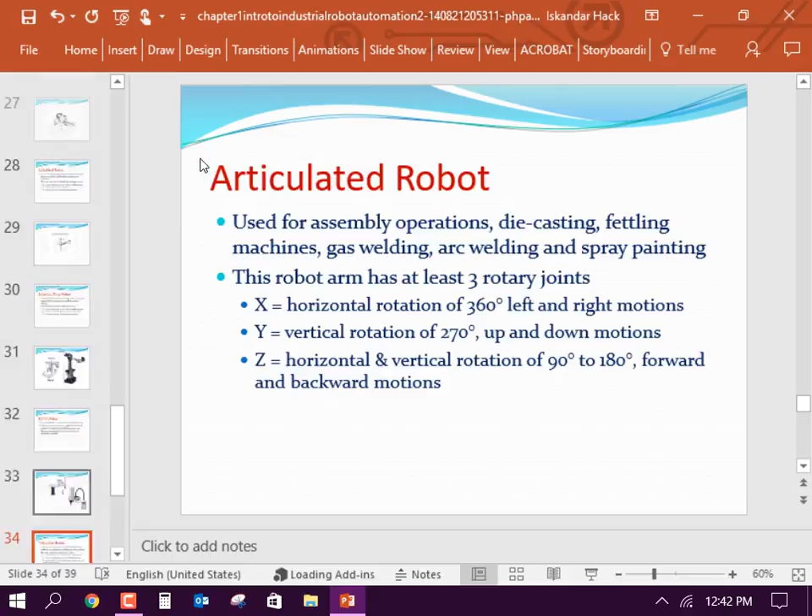All right, as a general rule, I hope that I don't have many canceled classes this semester. As some of you probably well know, last semester I had my stroke in April, which meant that I wasn't at work for about a month, and I'm still technically on MC. My MC runs through the end of October, and actually the doctor wanted to put me on MC till the end of the year.

And the reason I'm on quote MC, and I don't turn it in to UniKL also, I have the letter with me from the doctor saying that I'm not supposed to be at work because I have very low energy. I drive to work. I just started driving last week, by the way. My stroke was in April, and I was not able to drive till about a week ago. I had to force myself to drive because of my wife's surgery coming up. One of us has to drive, otherwise we don't eat, because neither of us have a lot of energy to cook.

So I come to class like an hour or two before class, get ready for class, and then I leave shortly thereafter. I'm not here a lot between classes. And Dr. Tyrell is very generous. He only gave me one class this semester, although it looks like I'll get a second class coming up, so I don't have it very tough. And the reason is also so that I can concentrate on my occupational and physical therapy.

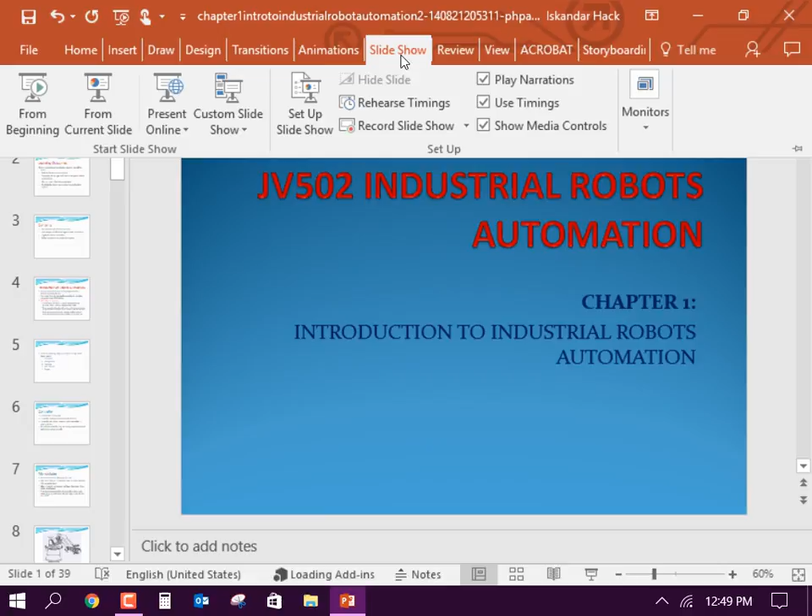So, okay, let me go through the slideshow from the beginning and talk about this. This is from a book that we're not using, and this is for a course that we're not teaching, JV502, Industrial Robotics and Automation. It happens to have the same title as this course, so the slides are good to steal, right? As I mentioned before, I used to worry about stealing people's slides, then I found all my slides have been stolen.

Okay, the learning outcomes for this chapter. I will try to find the book, but I will put up some links to some books that are available, or at least some good references. We're going to define what robotic automation is, the advantages and disadvantages, the 6 types, and explain robots automation in production. These are 4 things that cover the first few weeks of this course.

And I will tell you right off the bat that last semester and the semester before, one of the questions on the final exam is: state the advantages of using robotics in industrial applications. So right off the bat, this first set of slides has one of the answers to one of the final exam questions.

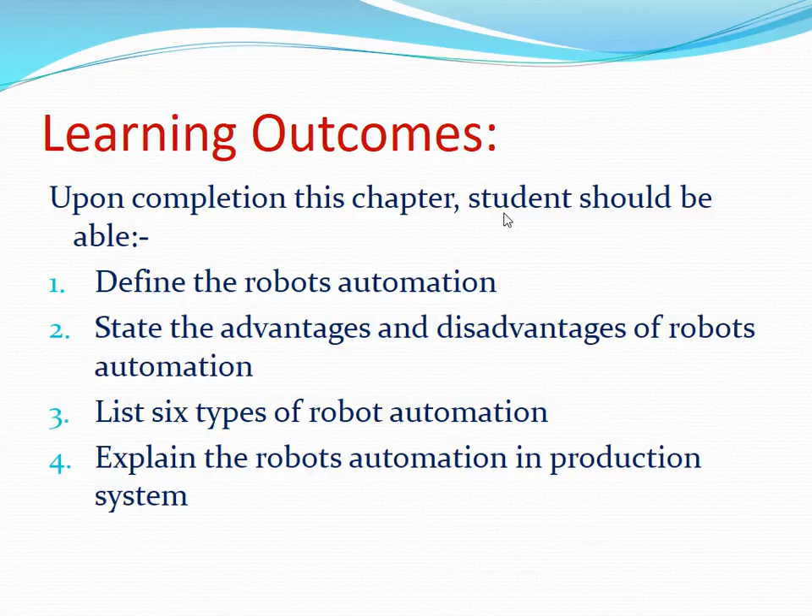Now, I'll review all these comments just before the final exam, but I'm saying that at least 1 out of the 5 final exam questions comes a lot from this first set of slides. So, okay, contents, this just repeats the same thing. Okay, what is a robot? I'm not going to read these to you, but I'm going to explain them.

It's a machine that can be programmed to perform a variety of tasks. In other words, it's a mechanical machine that's normally computer controlled, not necessarily, but normally computer controlled, that performs a task or a variety of tasks. Normally for something to be called a robot, it can't perform just one task, but multiple tasks. It can be reprogrammed to do different things. Now, the robots that were talked about last week in that video, some of those were learning robots that are being taught how to teach themselves.

As a general rule, 99% of the robots today that are outside the research circle are robots that are programmed to perform a task or multiple tasks by a programmer. Now, robots are designed and built by companies that build and design robots.

I suspect that none of you will probably work for companies that design and build robots, but I could be wrong. I used to say that back in the U.S., and lo and behold, General Motors, a company that some of you have heard of, and I'll talk about them in more detail, opened a factory in Fort Wayne, Indiana, the city that I was living in, and they actually had some engineers that graduated from our program design robots there.

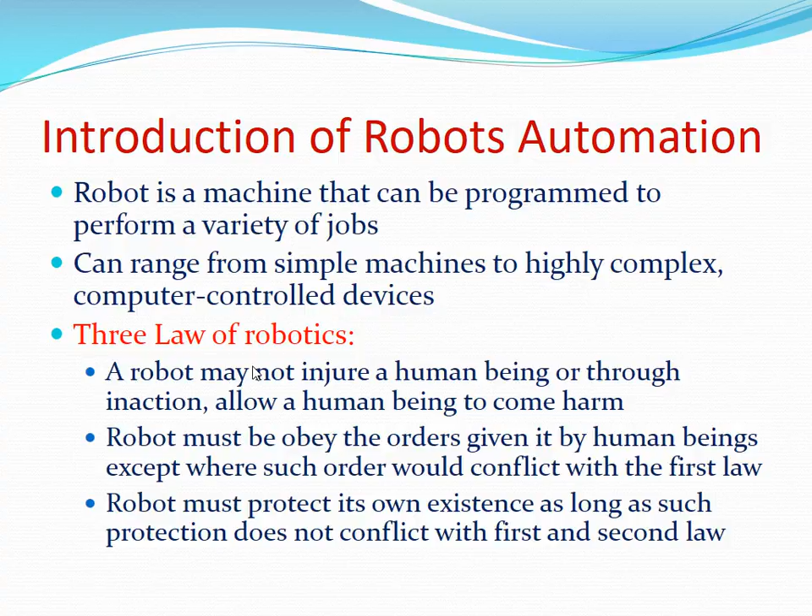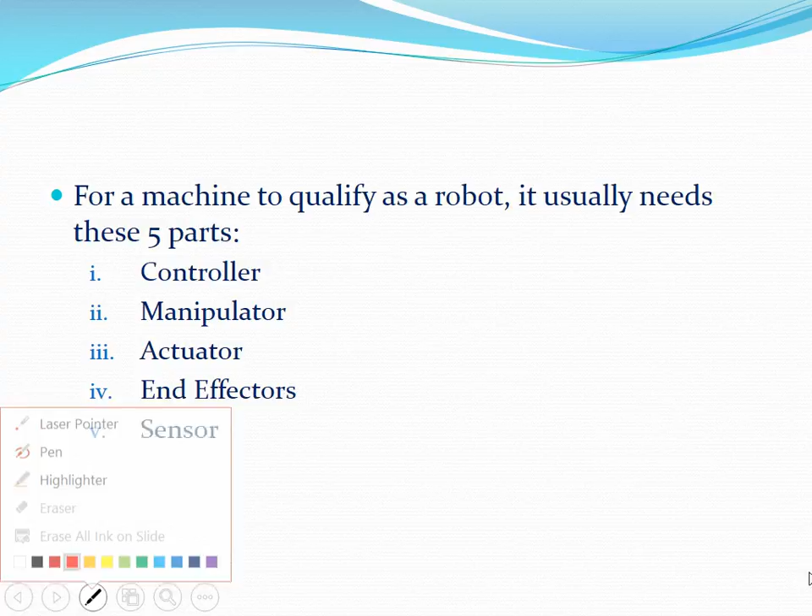Okay. Now we're getting into the 5 parts of robotics, and this is where my use of my hand becomes interesting. First, we have the controller.

Oh, that's right. This thing here doesn't work. I had that problem with one of my other classes last semester, that this pen doesn't work with some of these projectors. I think the mouse doesn't either? Nope. Okay. Well, we'll just use the mouse and point to it right there.

The controller is typically the computer system that drives the robot. And it can be as elaborate as a very large mainframe computer with multiple microprocessors. Some of the early robots had very elaborate ones. Or it could be as simple as an 8051 microcontroller. Raspberry Pis are becoming popular for small robotics. But the controller is typically some type of microprocessor or computer controller.

The manipulator, and these get a little bit tricky, that's the arm, your shoulder right there. That's the arm. That's what you manipulate in order to get the end effectors in position. In the case of my arm, and mine doesn't work very well right now because my controller is damaged, it is my hand right there. That's my end effector. That's what picks up this mouse. That's what enables me to write.

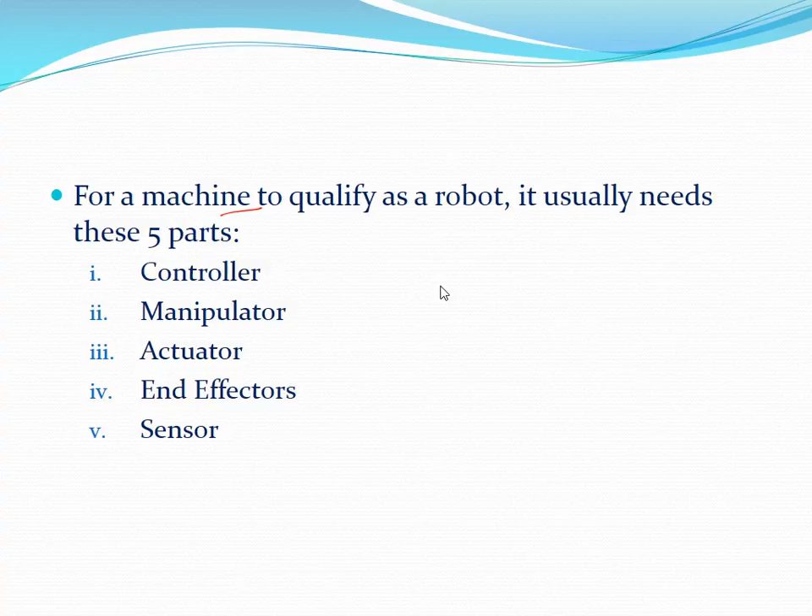So when we look at robotics, we have to design systems that can make these judgments. So the controller, connected to the computer, functions as the brain and can be networked to other systems. If you're designing, for example, a robot on a conveyor belt, it has to be interfaced to the conveyor belt itself, it has to be interfaced to a controller, maybe some cameras. So robots have controllers that are run by a programmed set of instruction code. In other words, somebody has to write the code.

But this slide actually is a little bit incorrect, in that quite often we write code to control robots that have what they call a teaching mode. So in other words, I can sit with a programmer and I can tell the robot what to do. And it will remember those instructions and institute the instructions as we go along.

Now, one of the things that is fairly common is that there's robots that, and again, the video showed one where the operator actually wore a suit with hand grips and the robot followed through what they were doing. Now there are robots where that's how you program them: you wear the suit, you show the robot what to do, and it remembers the steps. But again, the controller is the computer that essentially tells the robot what it does. It's the brain of the robot.

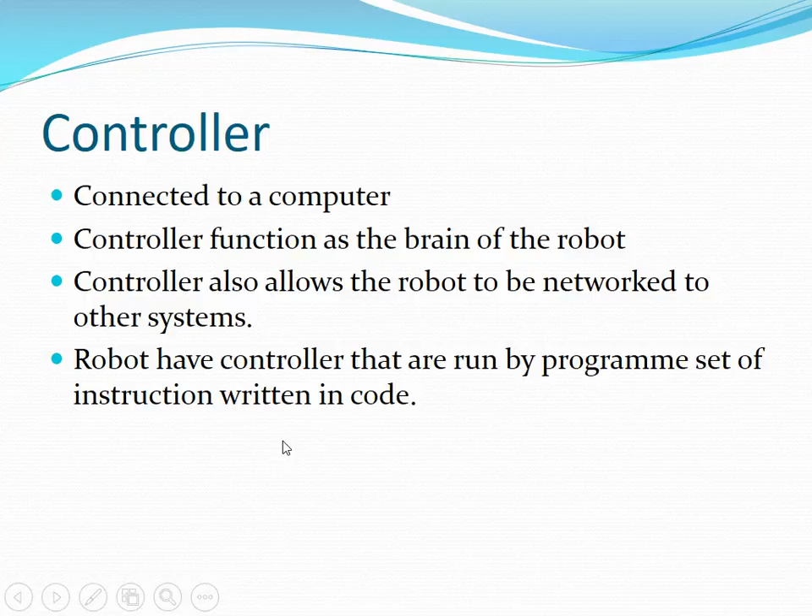Manipulator, this is the arm, and again it comes in all shapes and sizes. A simple arm is one that has maybe 2 or 3 joints. The simplest arm is one that just goes up, over, and down. That's a very simple manipulator. We're going to look at all kinds of things. Many resemble the human arm. You saw those last week. And again, this places the end effector and the sensors.

The manipulator itself doesn't do any work. All it does is bring my hand over. If I took my hand off,

let's not remove my hand. It's bad enough that it doesn't work very well. It's actually just starting to work in the last few weeks that I can actually pick things up. And every now and then it quits and I drop things. So my wife doesn't let me carry anything valuable. I've dropped more things than I care to mention.

Usually I get my foot under it before it hits the floor and breaks. But regardless, right there. But without the hand, moving my arm actually doesn't do any good. Well, if I want to reach down and pick up my pillow that's fallen on the floor in the middle of the night, and my hand isn't working, I can't pick up the pillow. And trust me, that happens to me more than once, where I have to get out of bed and use the other hand to pick it up.

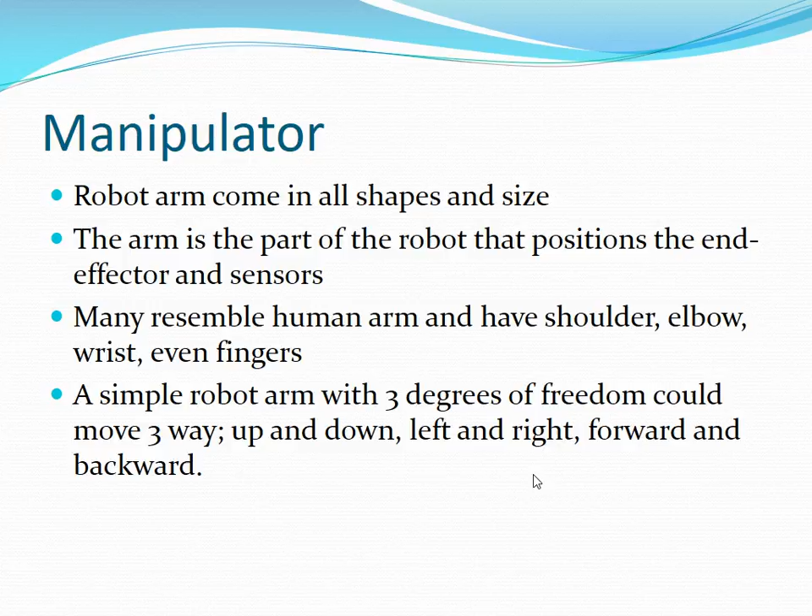If you have a robot that is damaged, then you have to reprogram it to work around the damage. So the manipulator is the arms, or the legs, or whatever. So here, this is a drawing. Here's a sweep, that's 1 degree of freedom. Shoulder swivel, that's another degree.

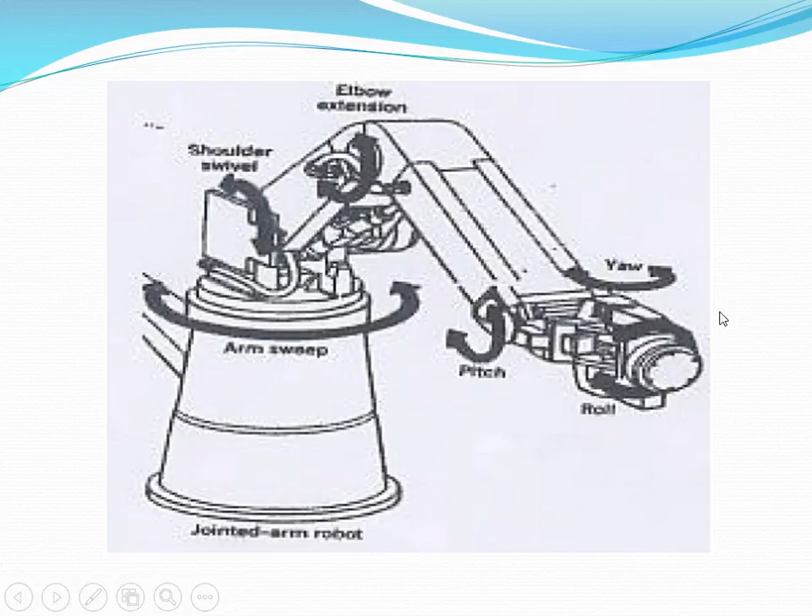Elbow extension. The pitch, right there, is kind of going like this. The yaw is turning this way, the roll, I guess, right there. So you've got the various degrees of freedom there. The actuator is a mechanism to allow it to move. Again, we talked a little bit about that. These are the pneumatic and hydraulic cylinders or electric motors. We'll look at a number of these.

We're not going to get into the real deep design. We could do an entire course on just putting together robots and trying to program them. And in a way, that's kind of what this course is supposed to be, but I've come to the conclusion that it's not something that's going to be useful to most of you. So I'm kind of going toward the idea of what you are going to be doing in industry.

I've already mentioned some of you will probably never see a robot, and some of you will be seeing them on a daily basis. For those who see them daily, what job functions are you going to be doing? You're not going to be building and designing the robot, not at this stage. You're going to be looking at the application. You're going to decide from a catalog or from talking to various vendors what robots you need to buy, and then how to get it and install it.

And again, you probably would be paying someone from Toshiba or Mitsubishi or whoever you're buying a robot from. In Asia, it'd probably be one of those two; the Japanese seem to dominate the robot industry here. There are others. In Germany, there are several companies that build them. There actually aren't that many American companies that build robots. They tend to buy the Japanese ones or the European ones. Actually, Sweden builds a number of robots.

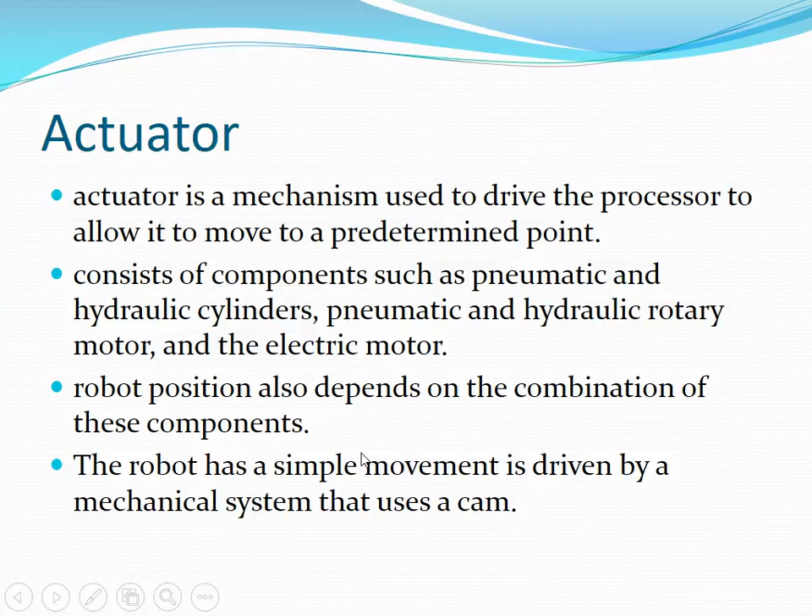Now, unfortunately, because these robots use a servo motor directly without any gearing mechanism and without any kind of hydraulics or anything, they're very limited in what type of weight they can pick up and carry. It could not pick up a 3-pound book, or a 2-kilo bag of rice or something like that. It won't pick up that much. It might pick up this mouse right there. And here this is just showing the actuator, and this is just showing a gear right there.

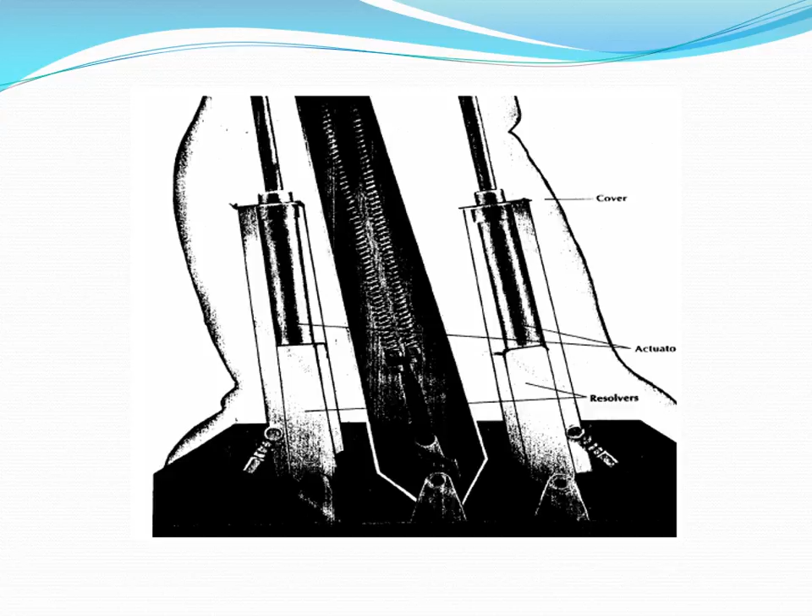So the end effector is connected to the robotic arm right there. The end effector is what does the actual work. It can be a gripper, it can be a vacuum pump, a hook, a scoop, all kinds of different things. I was talking to an individual that works for Intel. He was actually teaching a workshop.

They had a problem at work where their robot was a very small vacuum that picked up an IC and moved it to another place, and then was supposed to release the IC out there. The purpose was to pick up this little tiny piece of silicon that contained a microprocessor on it and put it inside the plastic packaging so that the wire bonds could be mounted to it. So in this particular case, it was a very small vacuum that picked it up.

Now, the robot we have has a gripper that opens and closes right there. Some robots have a hook to pick up an object, an engine, and move it and put it back in place. Or a scoop, where it can scoop up a whole bunch of biscuits to put into a bag. So these can be all kinds of things. In the human body, our hand is the most common one. Our foot is another end effector, but it actually does very little. All it does is balance the body as we walk.

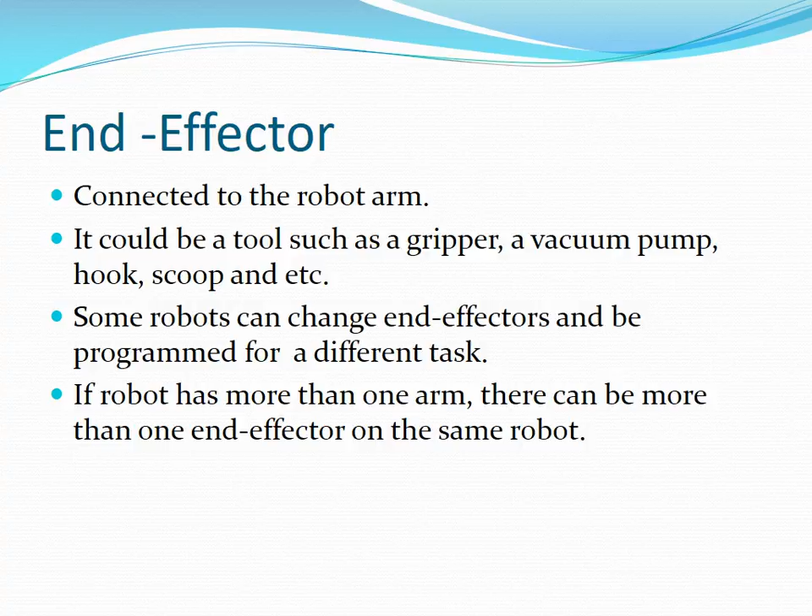So robots can have more than one arm. So you can have a robot that picks up an object, another robot that drills into it. But again, I'm probably going to wrap up with this discussion right here. These are the major parts of the robots.